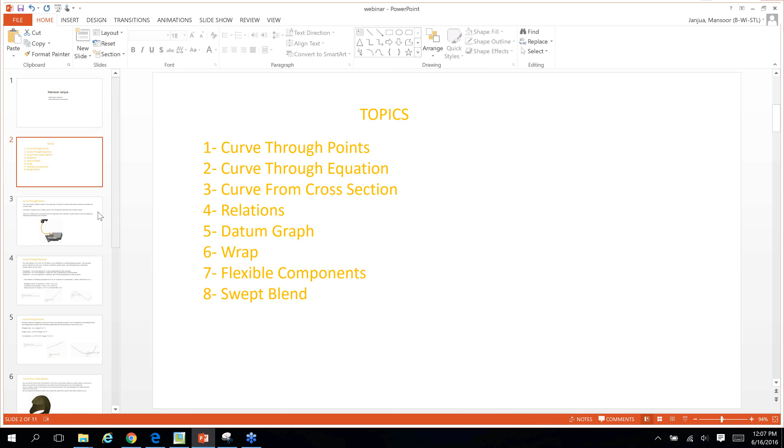So I'm going to start with the first one, which is curve through points. So basically, how do we create that? So you can quickly create a datum curve through a number of points. When those points are created as a point array, you can use a spline that enables you to create the curve through points. So the first thing is you actually need to create the points, and then you will create a spline that will pass through all of those points.

So you can select these points in one shot, or you can individually select them and then define radiuses as the curve passes through, or the straight line passes from one point to the next one. So let me demonstrate that idea. So in this case, I don't have points right now. So first, what I need to do is to basically create points.

So I'm going to go and select offset coordinate system to create the points. And now I am going to select a coordinate system with respect to which I will be creating points. So in my reference, I select the coordinate system, and then inside, I'm going to start clicking in this. And these are the coordinates x, y, and z with respect to the coordinate system that we have defined here. So I can give some values like 5, 8, and the z 3, and the x 4, and 6, and 8.

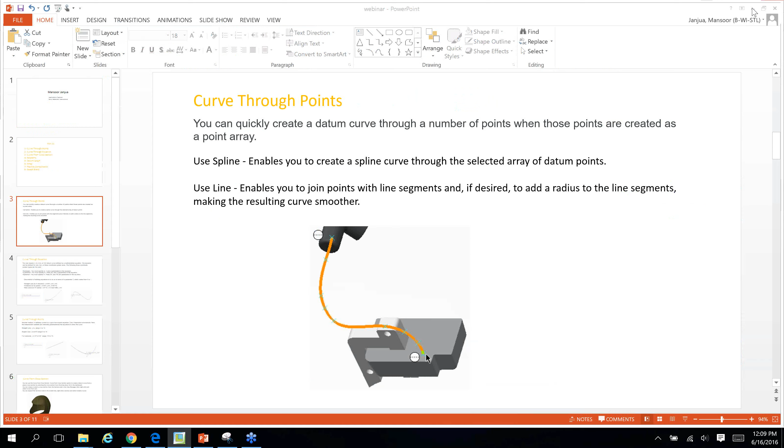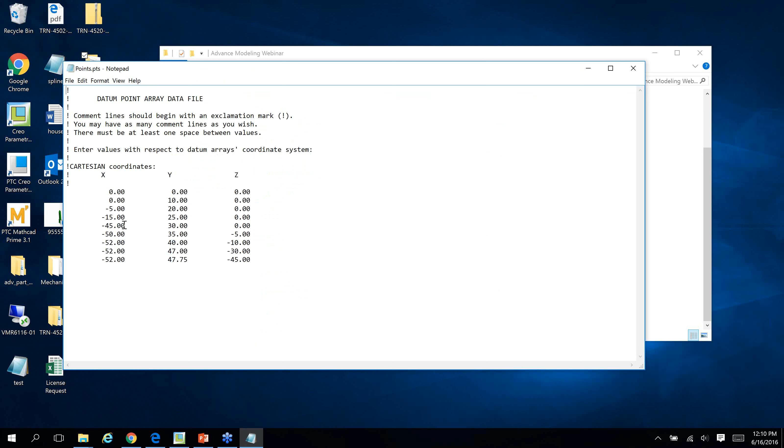Okay. So this is your Notepad file. You have all these points, x, y, and z, and this is one points file that I have created. So if you have the points file made, either you can make the points, or in this case, since I already have those, I'm going to delete those points.

So we have the coordinate system defined, and I will import the points that have been created in the Notepad file. So I'm going to import it, and this is the point file. As you can see, all the points have their coordinates defined in x, y, and z. So once I have the points defined, I can now go and select curve through points. So I will go ahead and select this.

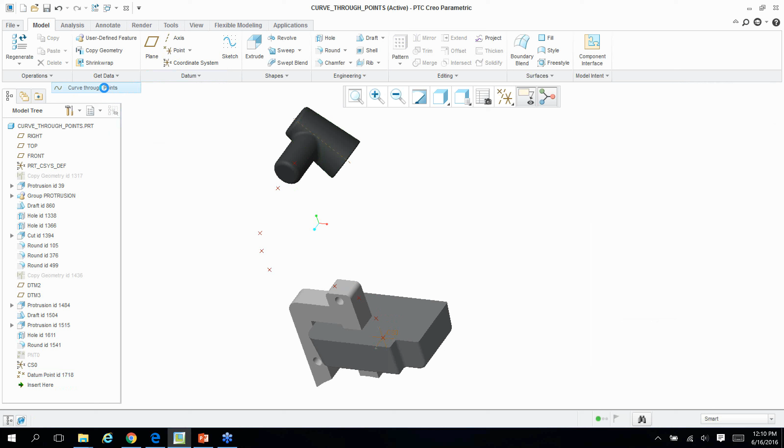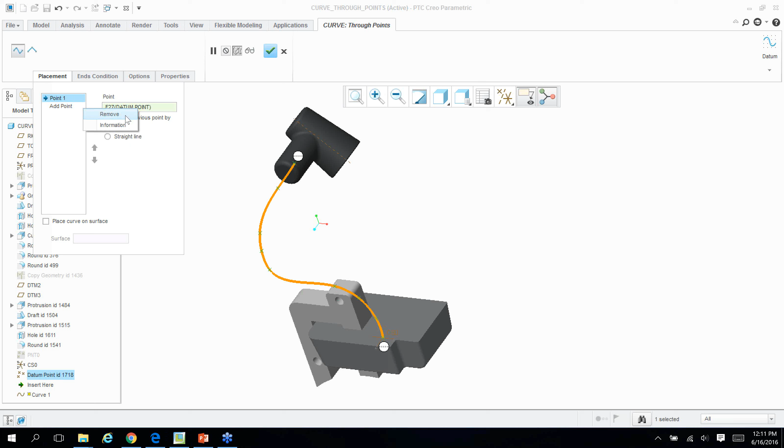I can individually select these points one at a time, or I can quickly right-click, and then all these points get selected in one shot. So right-click and then left-click, and you can see that it creates a spline which passes through all of these points. If I don't do it this way, I can manually pick one point at a time, make those either a spline or a straight line, and also add radiuses as the curve passes from one point to the next one.

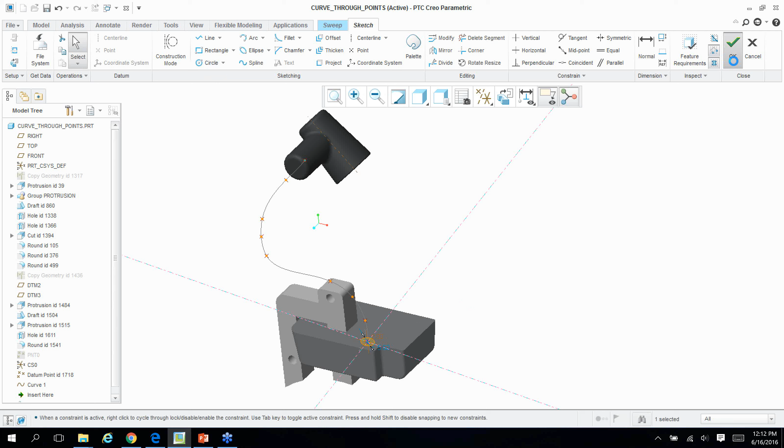So I'm going to delete these ones here, and then simply select the curve. As you can see, this is actually a 3D curve. Okay, so once the curve has been created, you can use a sweep feature and just create any sketch, which will follow the trajectory. Okay, so this is a curve that is created through points.

So the next topic in the list is the curve through equation. You can create 1D, 2D, or 3D curves using a mathematical equation, and you can define either the Cartesian coordinate system, cylindrical coordinate system, or spherical coordinate system. And there are two ways that you can define the curve. One of them is called the parameter t, and the parameter t ranges from 0 to 1.

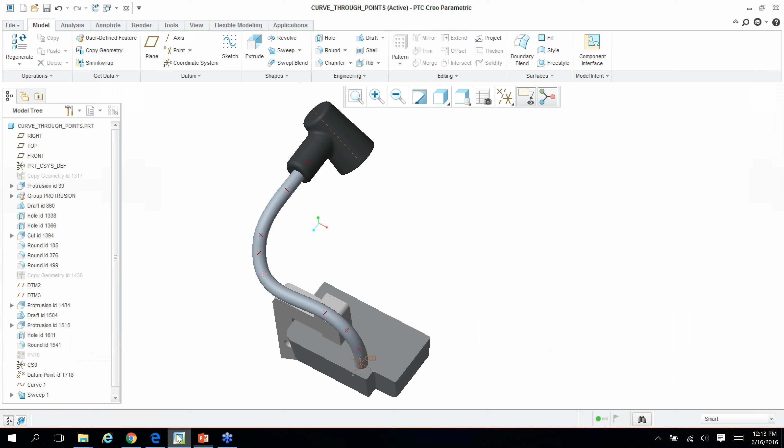So I'm going to create a few curves using the parameter t, and then I will show you the other way of making the curve through equation. All right, so to create the curve through equation, I'm going to go to Datum. Under curves, I will select curve from equation, and at this point, I have to define whether the system I'm using is a Cartesian or cylindrical coordinate system. So I'm picking Cartesian, and I also need to pick a coordinate system. I will pick the default coordinate system in this case, and then I will define the equation.

So the equation, I will write it here. x, I want it to be 6 times t, because the variable t ranges from 0 to 1. And then I also have y equals 14 times t cubed. In this case, it's just a 2D curve, so z I'm keeping as 0, even though I don't need to put z. So I press OK, and I can look at this.

So this is how the curve actually looks like. So this is a two-dimensional curve in x and y. And I can always go back and redefine the curve if need be. Okay, so that's basically the first curve that I just created.

So now I'm going to also create the curve in another coordinate system. So this one, I will define the curve in the cylindrical coordinate system. So I will pick the cylindrical. Again, I will pick the same coordinate system, and I will go to the equation. And this time, the equation will be written in terms of r, theta, and z.

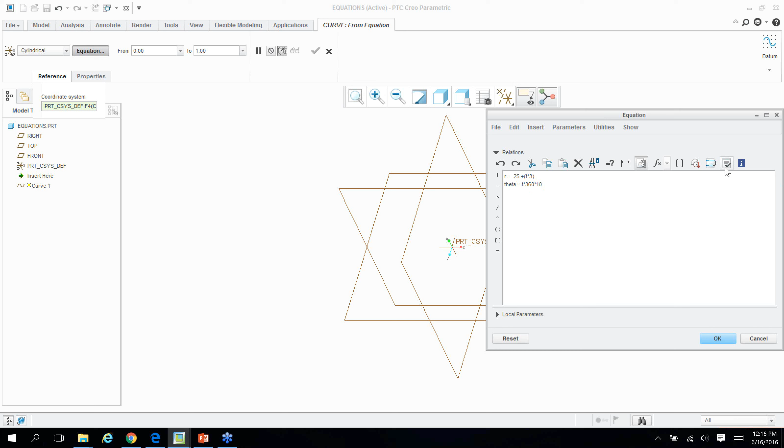And before we actually exit, it's a good thing to always verify that the equation that you have written is good or not. So you can always go and verify this equation. So relations have been successfully verified, and I can press OK. So this is how the curve actually looks like. So again, you can go and use this curve for your sweep feature. So the next one,

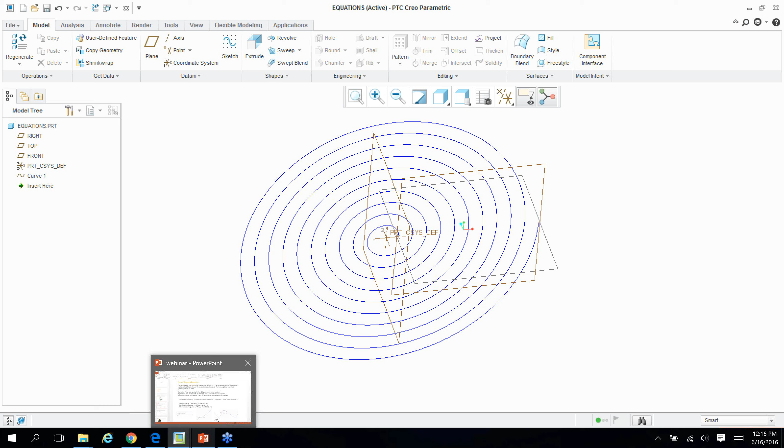in defining the curve through equation, is that you can define this equation explicitly. This is an explicit equation that instead of defining in terms of parameter t, you are defining your y in terms of x, and your z will also be in terms of x. So you will have only one independent variable, and the other two variables will be defined in that. The parameter t can only range from 0 to 1, and of course we multiply with other things to basically get a bigger range.

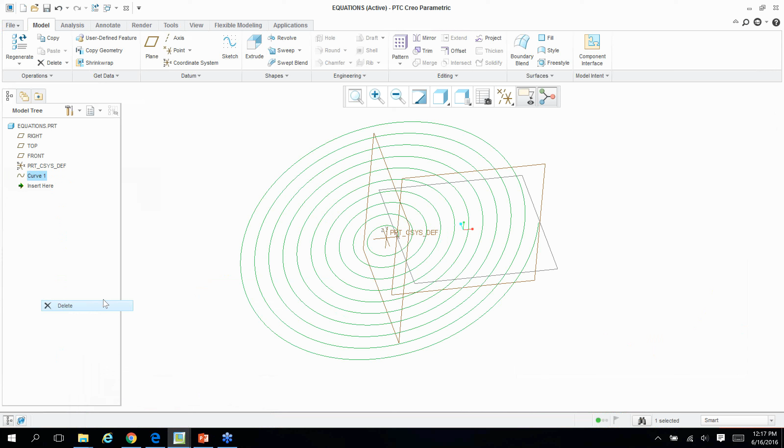But when you're using an explicit equation, the independent variable can take any values. You can basically go from a pretty high negative number to a high positive number. So let me just define a couple of equations in the explicit form. So I'm going to delete this one. So I will go back and define the curve from equation, and I will pick the Cartesian. I still have to pick the coordinate system.

Once that's established, I will go to the equation, and the equation in this case is y equals 100 times sine of 2 times x, which in this case is the independent variable, plus 10. Okay, so that's an equation, and I can verify this. So right now the x value, which, as I said, can range from anywhere, is only from 0 to 1, so I can change it from 0 to maybe 20. Actually, let me first exit out of this, and then I will give the limits.

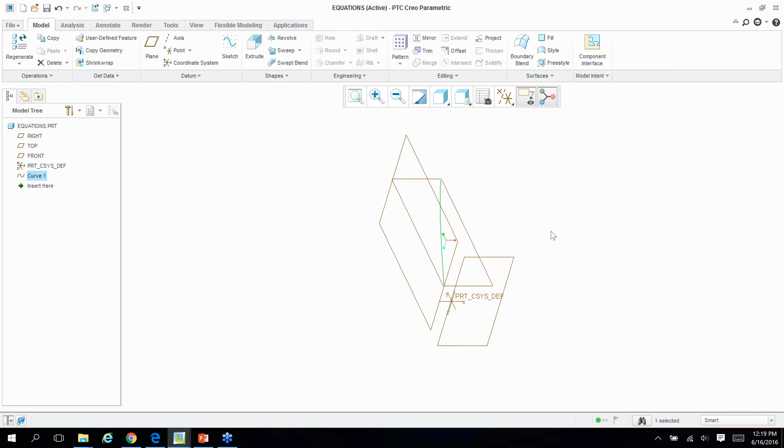Okay. So you can define this, or if you want, you can go back and define it to a bigger limit, because I have a sine wave. So let me at least get it up to this. So you can see that the sine wave is generated for x of 360 degrees in this case. So that's the equation using the explicit form, having one independent variable. I will also go and make another one in terms of cylindrical.

So curve from equation, you will pick the coordinate system, and I want the cylindrical coordinate system. I'm going to define the equation. R is equal to 1000 and z is equal to 5 times theta, so I will look at that. So as you can see, it's giving me an error message.

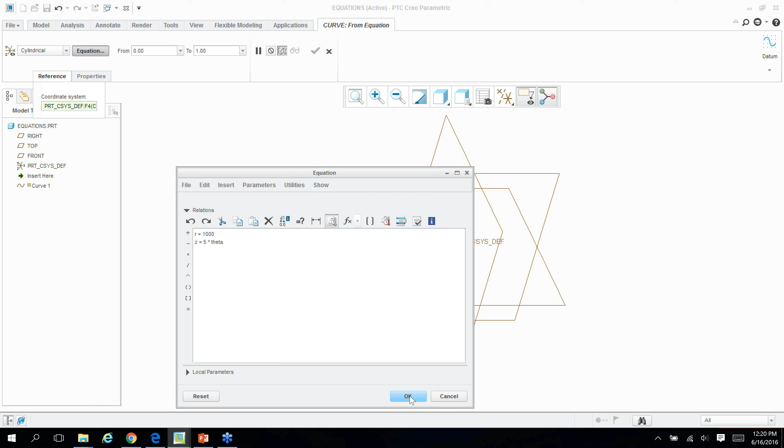So R is equal to 1000, Z is equal to 5 times theta. Okay, check your relations, everything looks okay. And then the limit for this is also from 0 to 360. And this is how the curve looks like. So you can see that this is the curve through equation.

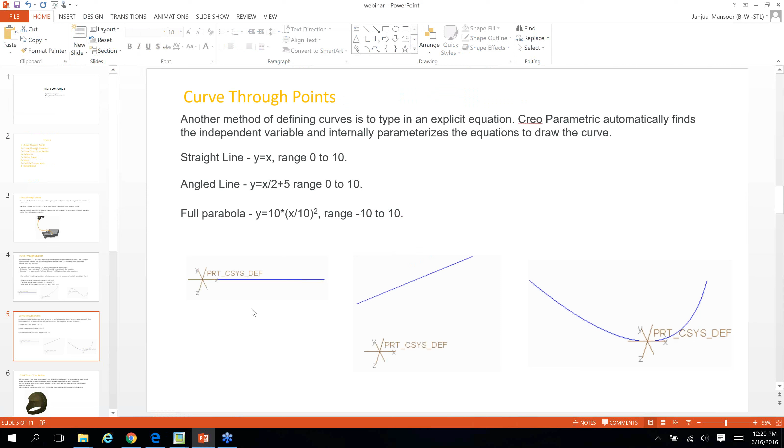And the next one in the list is creating a curve from cross-section. You can use the curve from cross-section option to create a datum curve from a planar cross-section by selecting the cross-section. So basically, we will create the cross-section first, and then using that cross-section, we will generate a curve, and that curve can be used for the features that I discussed earlier. You can use it in variable section sweep, boundary blend, swept blend and other features.

Okay, so I'm going to close these. So, curve from cross section. All right, so I'm going to go ahead and create a cross section.

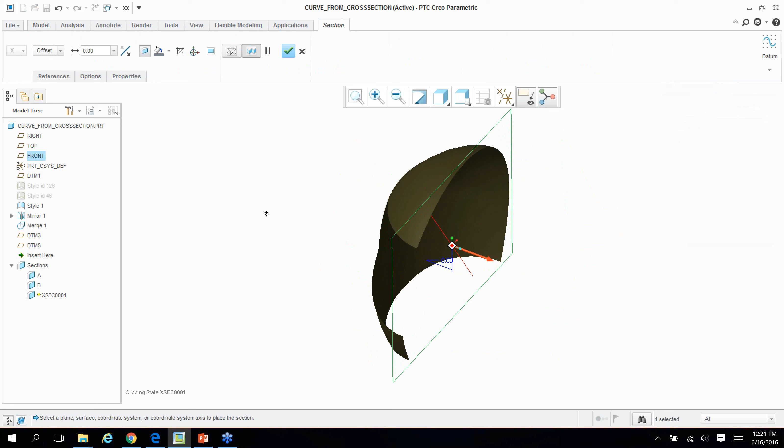Okay, so a cross section has been created, and I just want to make sure that I include the selected quilt. Okay, so a curve has not been created here, but the cross section has been created. But what I'm going to do, I can simply go and define this curve from cross section, and I simply select this over here.

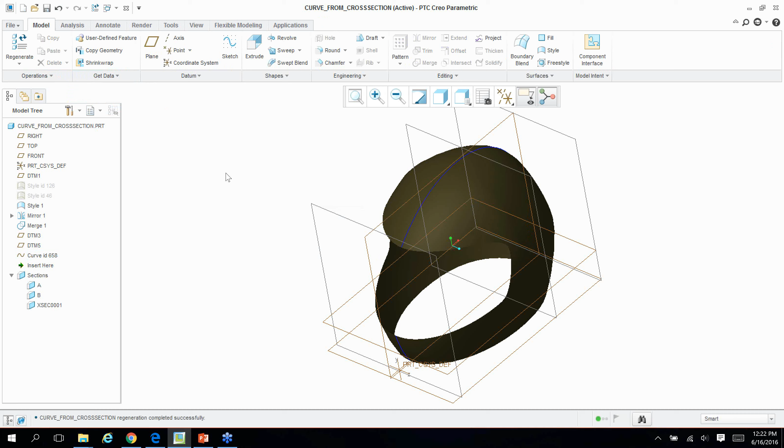So now this is a curve that I can use. So I can use this curve pretty much for any feature. So you can see that I can use this curve to define... okay.

All right, so the next topic in the list is defining relations. Relations are user-defined equations written between dimensions or parameters. Relations let you capture design intent by defining relationships within the sketches, features, parts, or assembly components. Relations can be simple assignments, equations, or complex conditional statements.

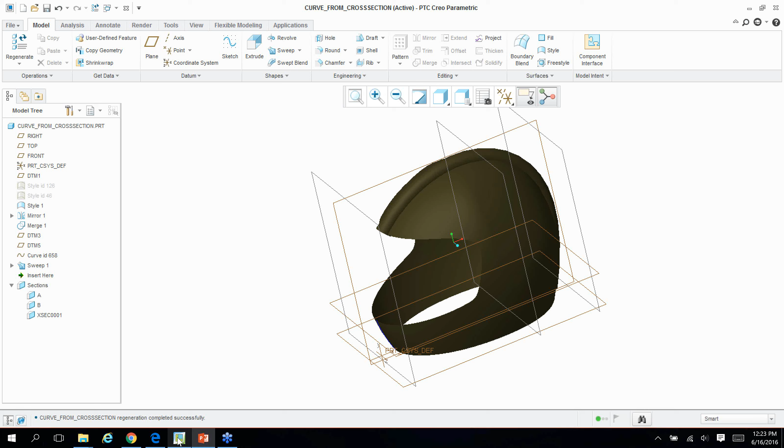So you can use relations for your design intent, how you want the part to predictably update as you make any changes, and you can also write comments on exactly how the part will update as you make changes to any of the dimensions. So I'm going to open up a couple of parts for relations.

So in this case, I want to establish a relationship between this hole and this hole, that I want the diameter of this hole to be always 1/4 of this diameter. At the same time, I want this diameter to also depend on the length and the width of the part.

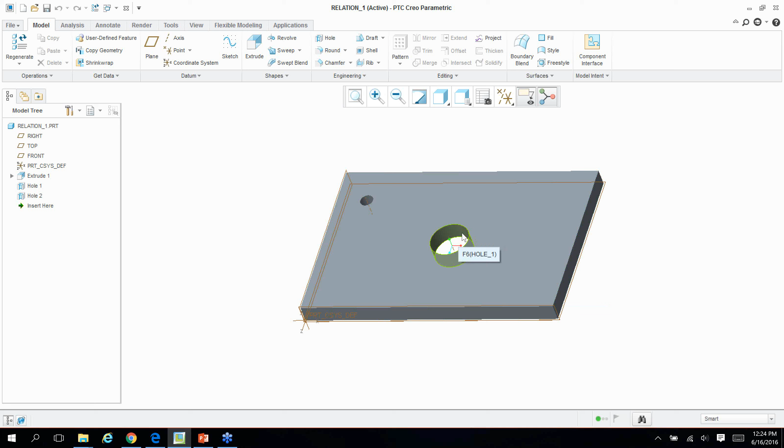So if the length of this part is greater than the width of the part, I want a certain diameter. If the length is less than the width of the part, I want a certain other diameter. And once that diameter is established, only then this diameter will be 1/4 of that. So that is what I'm trying to create in the relation.

So I will go to the relation, and I will pick all the dimensions that I can see. So I'm going to define it in terms of an if statement. So if D2, which is this dimension, is greater than D1, and I can give some space in between so that it's easy to follow. So if D2 is greater than D1, then I want dia 1, which is this diameter, to be equal to 60.

Otherwise, if D2 is less than or equal to D1, then I want dia 1 to be equal to 40. And I also want to establish a relationship between this diameter and this diameter. So I will say dia 2 will be equal to dia 1 divided by 4.

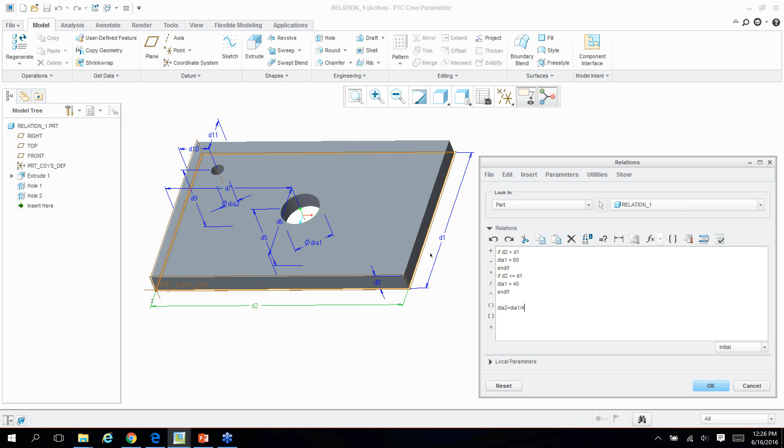So this diameter is no longer an independent variable because it's dependent on that. At the same time, this is not an independent variable because I cannot change the value. This dimension is also coming from the relation based on the conditional statement. If D2 is greater than D1, then it will be 60. Otherwise, it will be 40. So I cannot change this. I can only change these dimensions here. So I press OK.

And I will go and regenerate this. And you can see that because this dimension is greater than this, this diameter should be 60. And if I try to double click to change it, I cannot. But I can definitely go and change this extrude dimension. So now if I make this smaller, let's suppose I make it 199. Okay, so now this diameter actually becomes 40 because this dimension is less than the width of the part.

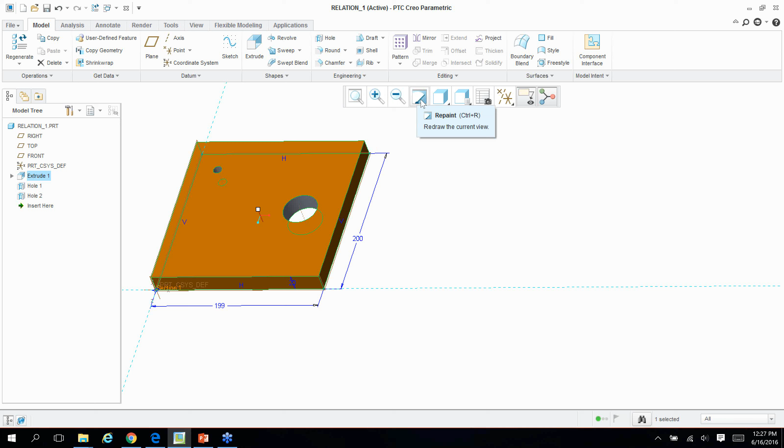So with this, you can establish different types of relations so that your part updates predictably, and you can always go back to relations and modify them. You can also write comments in your relation. Okay, so this is a comment, and before you exit out, you can make sure you verify your relations, that everything is okay. You can also insert some built-in functions, so sine, cosine, ln, log, different functions you can put in.

Another relation that I'm going to create is for the pattern members. So I want the pattern to basically update, even if I make any changes to the pattern members, I want them to be equally spaced on whatever the overall length of the part is. So for this, I'm going to establish a relation.

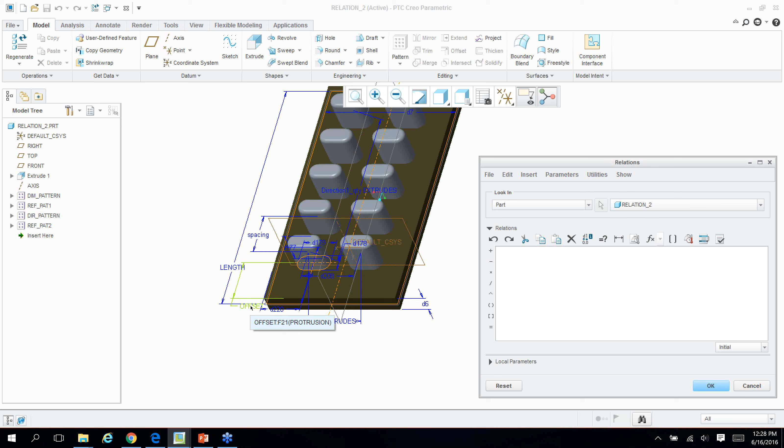So I will click on the features either from here in the model tree or on the part itself, and then see exactly what dimensions you can have. You can see them either symbolically, by just switching the dimensions, or you can see them numerically. So the relation that I want to establish is that this offset distance, I want it equally spaced in between and also in the front and at the end.

So I will say offset is equal to the length, which is the overall length of the part, divided by the number of pattern members, which is this one, plus one more, because I have extra space here. So I want to divide it plus 1. Okay, and this is the same that I want for the spacing also. The spacing is also equal to the offset because I want equal spacing. So I can verify the relations, everything looks okay.

So now when I go and I try to change this direction pattern, so instead of having 5, I can have 4 members. And you can see that they are equally spaced now. So the offset and the spacing between them have been controlled using the relation.

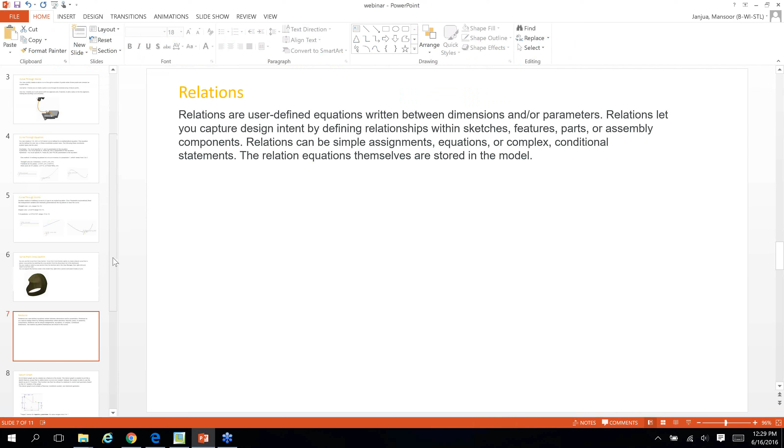And then there will be something else that I will talk about using the trajectory parameter. The trajectory parameter is very similar to the parameter t, that can only take the value from 0 to 1. So it can only range between 0 and 1. So let me go and define a graph feature. All right, so I'm going to go ahead and create a graph, actually somewhere over here.

Okay, so to create a graph, I will go to the datum group, and in here we have the graph, and I can give it a name. I will just leave the generic name graph_1. And for the graph to work, you definitely need to have a coordinate system. So I will create a coordinate system, and I'm going to create the horizontal and vertical line, even though the only thing that you need is the coordinate system, and after that you need to create a sketch.

And I will also use another center line for the overall dimension for the graph. So this is 120. And I can basically create any graph or any shape that I want. Okay, I can dimension it, or I can just leave it like this. So this is my graph, and if I need to modify, select OK, and you can come back to this graph and make changes if need be.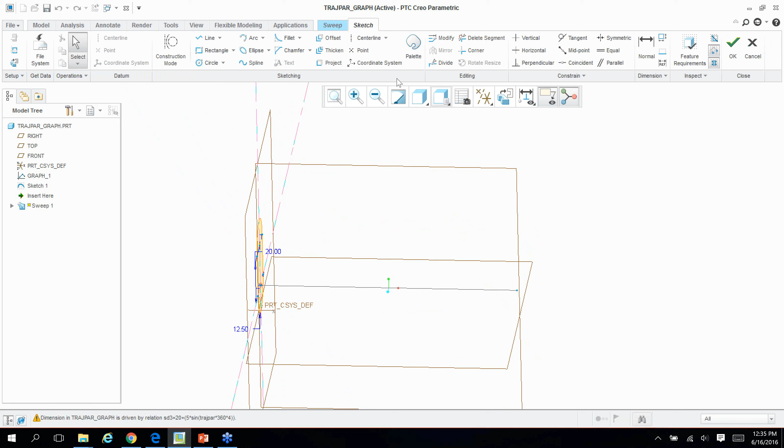So this is a regular equation that I have used based on the trajectory parameter. We haven't used the graph that we just created. So I'm going to make this a comment so it will not affect anything. So this is just a comment right now.

So the second relation that I'm going to establish now, I will call this SD3, which is this height, equals to, I want to evaluate the graph, and this is a built-in function that you can either type in or obtain from the function list. So evaluate graph, and then in quotation, you have to give the name of the graph, which is the graph one that we created.

And I will also have to say trajectory parameter, so you start from 0 all the way up to the width of the graph, which in this case is not the x, the overall length, which we made as 120 for the graph. So we are defining in terms of x and y, but the x in this case is 120. So I will make sure that my relations are okay. So now I go check mark.

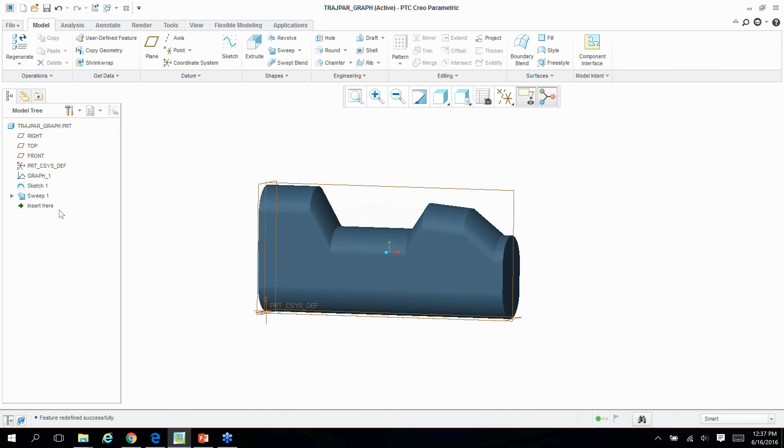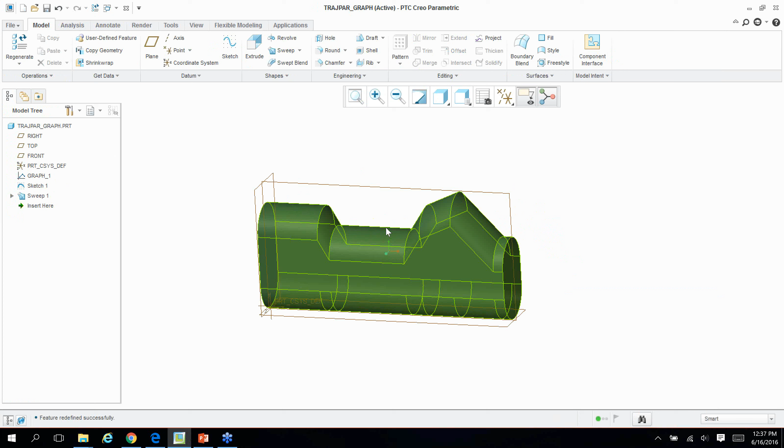So if you recall, the starting point of the graph was 33, and then as it went over, this is the sketch that we made for the graph. And if you go and modify your graph, this will also update. So this is the overall height. So I can go in and change some of this, and you can see that you're controlling the geometry using the graph.

So the next topic in the list is also a pretty neat topic: the wrap feature. There are certain curves or sketches you can make using curve through points, curve from equations, or using the cross section. But there will be some curves that you cannot make using a regular equation, like a curve which you want to go over the surface. So the wrap feature is very useful for that.

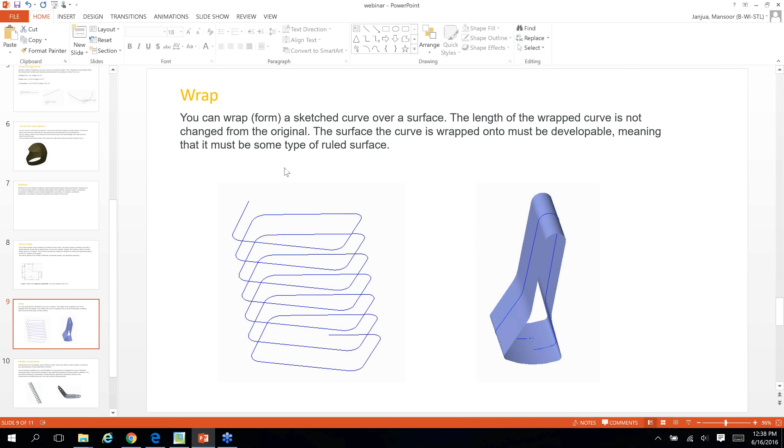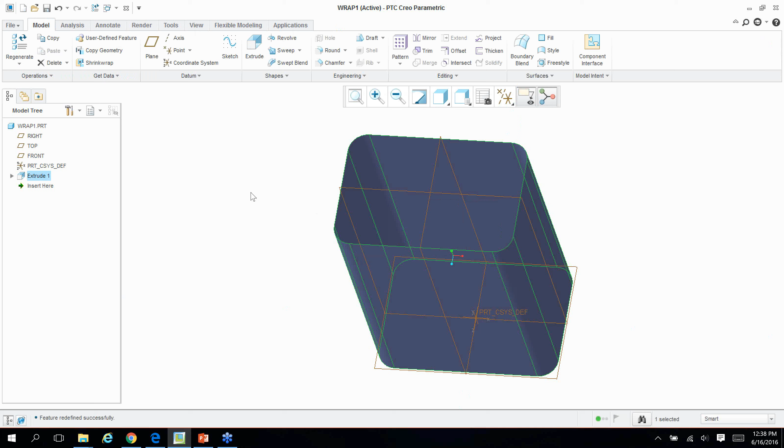So I'm going to show you. In this case, I have created an extrude using a surface. The reason I'm using a surface is so that you can hide it after the curve has been wrapped around. If you make a solid, you cannot hide that. So I will go ahead and use the wrap feature. Under editing, you can select wrap, and then I will select the quilt. In this case the quilt is automatically selected, but if need be, you can select it, and then you will go and define your sketch.

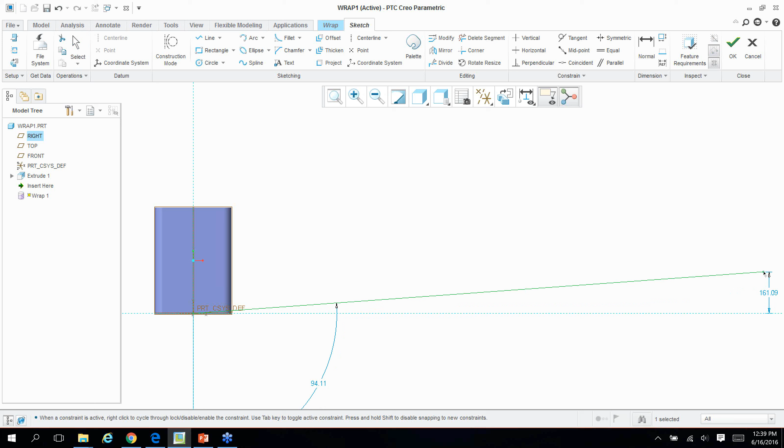So I'm going to click on define, and I will pick this as my sketching plane. Okay, so I will just draw a line like this. I will specify a height, or even I can extend it. And I also need to define an origin. This is the point for the origin. And as soon as I go, you can see that the curve gets wrapped around.

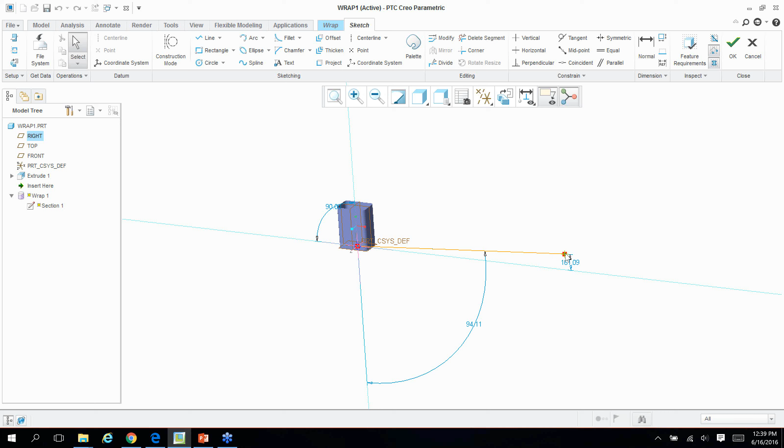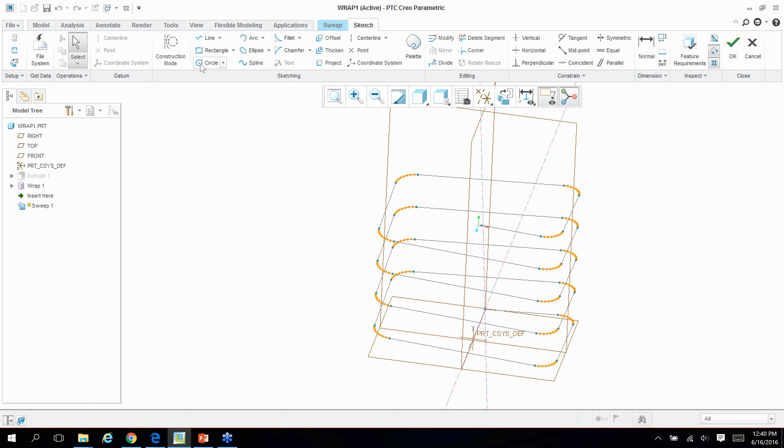You just have to have more length for this line, and then it will wrap around this feature. Okay, so I can go ahead and hide this, and you can also use this for any sweep feature that you want. You can define it, go and create a sketch.

So you can see that this type of curve you cannot get from regular datum curves. You have to use a wrap feature to obtain this. Another part that I want to show you is this wrap over here. So in this case, I have this, and I also have a curve made. So this is the surface, and I want this curve to wrap around this extrude feature.

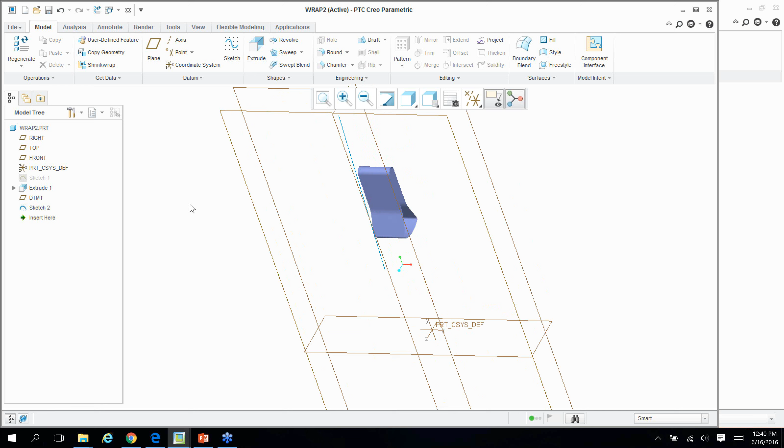So when I go to editing, I go to wrap. I select this quilt, and then I can either define this sketch, or I can actually select this sketch. So I'm picking this sketch. In the previous case, I did mention that you have to create the origin about which the curve will wrap. But there are two ways to do that: you either create the sketcher coordinate system or use the center.

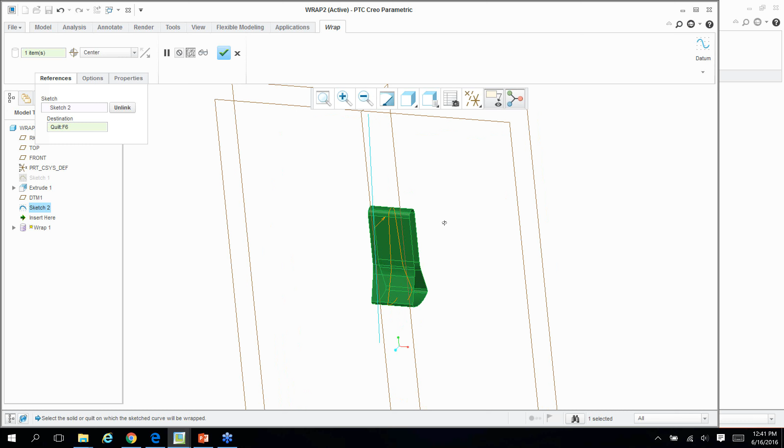The reason you have to create the coordinate system is because if you use the center, whatever the curve will be, it will just pick the center point of the curve, and you want the projection of that line, at least the half point, to be on the surface itself. If you make a long enough curve that this center is above it, it will not wrap around.

So that's why you make the coordinate system, so that you know it will always be wrapping around, because if I make the coordinate system over here, we know that it will start to wrap around from here, so it will be projected onto the surface. So if I make this curve any longer, because we are using the center of the sketch and not the coordinate system, the feature will fail. But in this case, it should be okay because it is still projected on this.

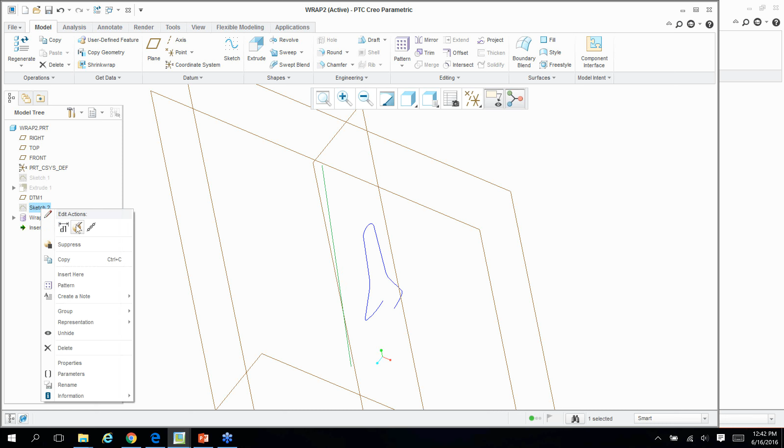So I will just hide that extrude, and you can see that it was at an angle, so then you have this feature, and you can go back and use a sweep to make it. But going back to my previous point, if I have this curve and I make it any longer, the center point will change and will no longer be projected on the surface. So if I do that, the feature will fail.

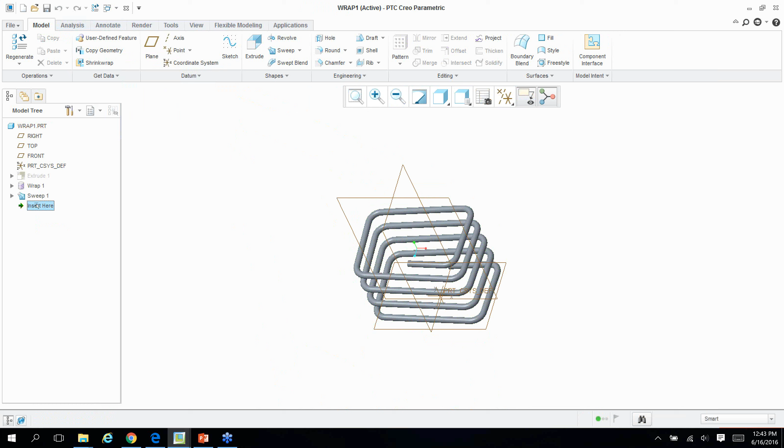So to avoid this, in the previous case, that's one of the reasons I created this wrap feature. I'm going to unhide this and make another wrap feature here. So in this case also, if I pick this and I make a line something like this, the center of this will be somewhere over here. So if I try to wrap it, the feature will fail. It will not work.

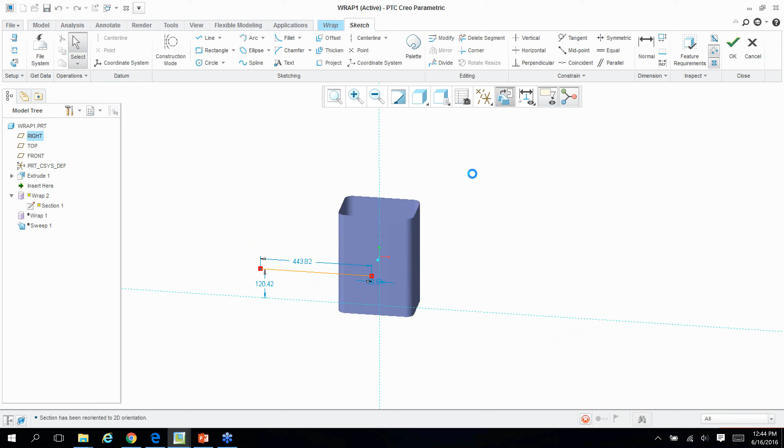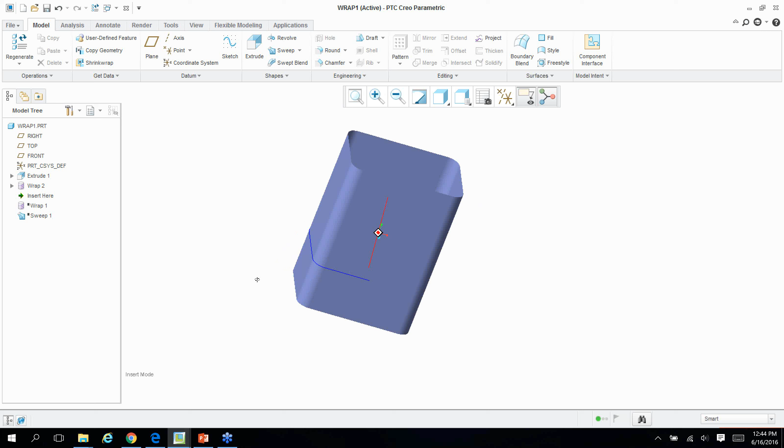So for this reason, I had to create the coordinate system. Once you have the coordinate system defined, now it's starting to project from here, which is still on the surface itself. Even if I try to make the coordinate system here and then the curve, because there is no surface, the feature will also fail in that case too. All right, so that's the wrap feature.

So let's go to the next topic in the list. The next is flexible components. Components such as springs, clips, brackets, hoses, wires, cables, rubber, and washers all typically vary geometrically in their assembled condition. So if you design a spring with a certain length and use the same spring in different places of the assembly, the distances can vary, so you can make certain dimensions flexible, so when it goes to the assembly, you can keep the same dimensions, or it will ask you to vary only certain dimensions.

You aren't actually creating new parts. If you have a bill of material in your drawing, it will still be showing this single component, but you can have different lengths as you are assembling it.

So Creo Parametric enables you to add flexibility to a component by changing the value of selected component items. Note that this change is only within the assembly, and the part remains unaltered. Whatever the length of the part is, it will stay the same, but when you are putting it into the assembly, that's when it's going to change. You can make dimensions flexible, you can make features flexible.

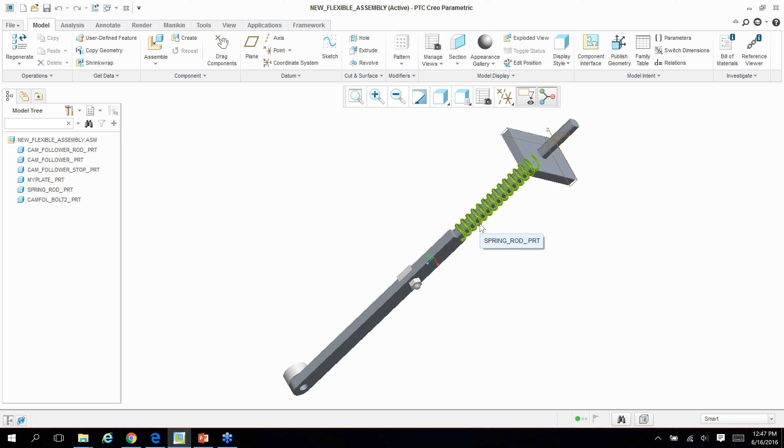There are a couple of ways. One of them is, if a component is already placed in the assembly, I can make the component flexible over there, so only that component is flexible. Or otherwise, I can make this spring flexible anytime you bring it into the assembly, because if I just do it over here, the next spring I bring will not be flexible. It will only make this component flexible.

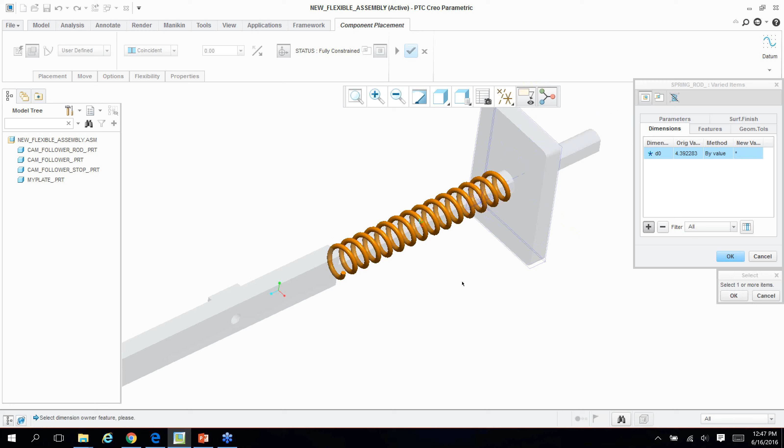So if I select this, I'm going to change this and make it flexible. And I will pick this again. So I have this dimension, and I'm going to change one of these dimensions. So how do I want to change it? I can change it by value, or I can change it by distance.

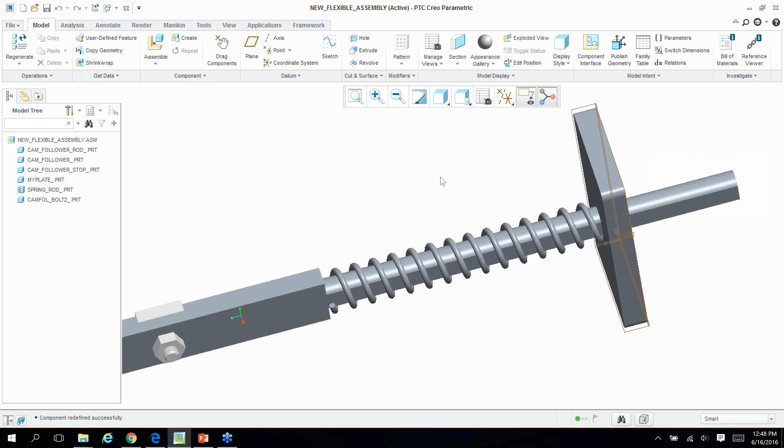So I'm going to pick this surface, hold the Control key, and pick this surface, because these are the surfaces that were used to place this component. As you can notice, initially when the spring was installed, it had this dimension, but we are trying to control it from this side to this side, this distance. I press OK. This is an assembly, so let me go back

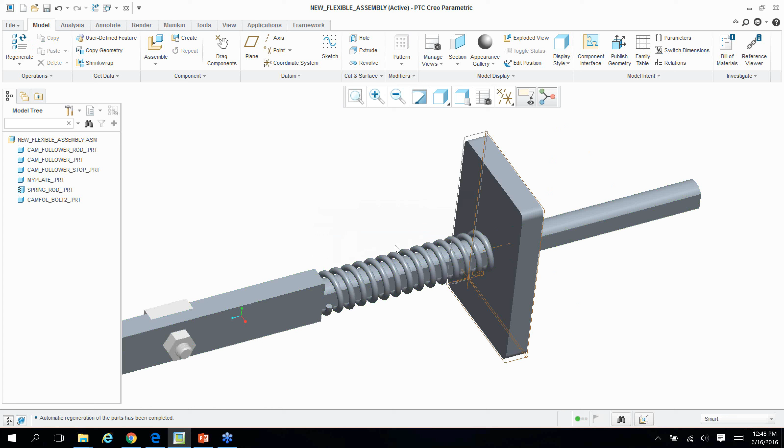and modify this. So I go to Edit. Instead of 4.5, I make it 3, and I regenerate, and you can see the change because of the flexibility in the component. But if I open this back up, it still has the same length we started out with. So I can always go back and look at this overall length.

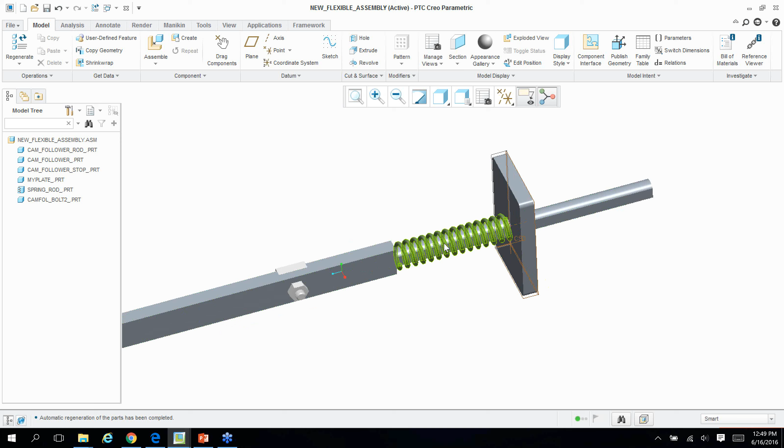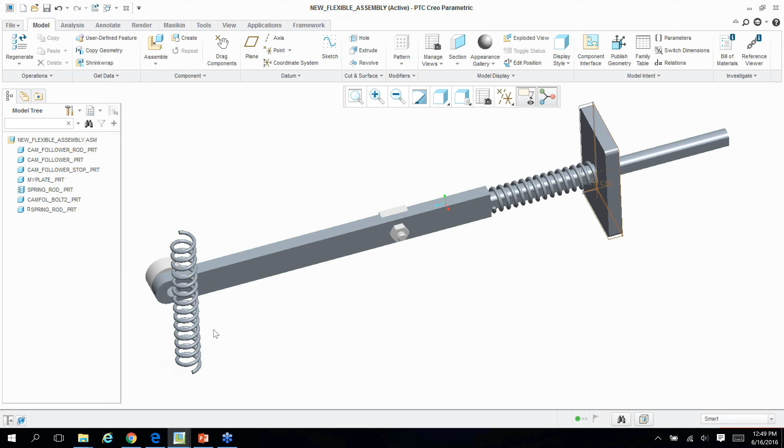So you have the 4.392, which is the length of that feature, but because it's now made flexible, it can be varied. And if I bring another spring, which is the spring rod here, this component itself is not flexible, because as you can see, it did not ask me for any dimensions to vary. It's just coming in with whatever dimension we had.

But what I can do, I can make certain components flexible. So this is the component that I want to make flexible, so that every time we go into an assembly, it asks me what features I want to change and so on.

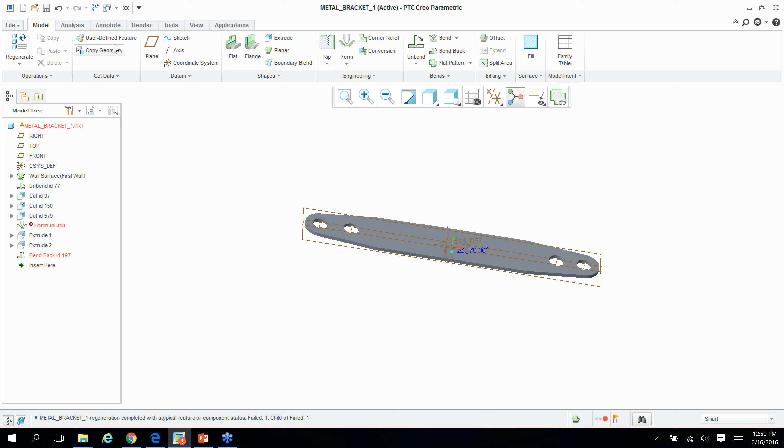Okay. I think probably this feature, I was working on it, and so I'm going to just delete that feature.

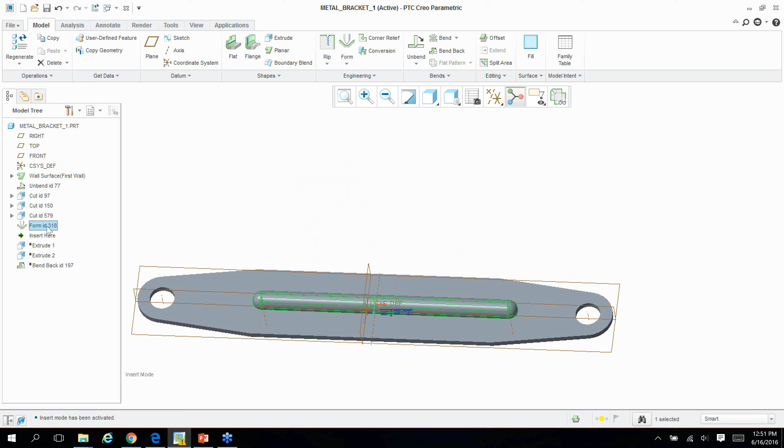All right. So I will go ahead and add flexibility to this bracket. I will go to File, Prepare, Model Properties, and in this I will make it flexible. So I will go and change. Do I want to change the dimensions? I can also add features. So I will first pick this, and I want to change this angle dimension. The part is designed at 78 degrees, but when you are assembling it, more likely it will be 90 or some other angle.

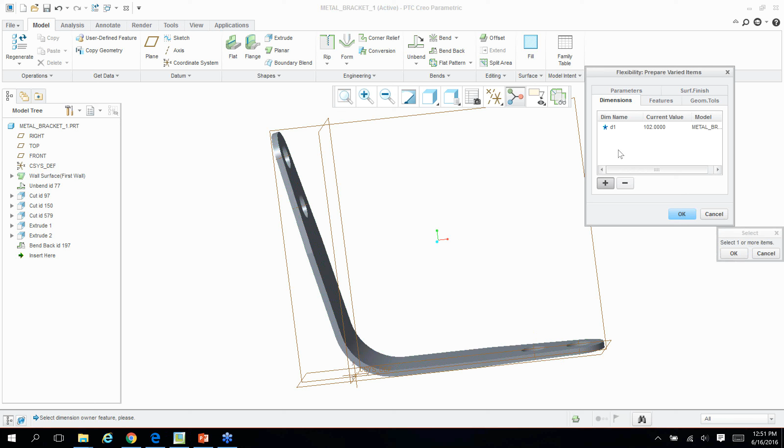So I will pick this dimension. This will be the dimension that I can vary. At the same time, I can add some features. So I can pick this hole here, hold the Control key, and pick this hole. Those are the features. Those are resumed, but I can also make them change when we put them into an assembly.

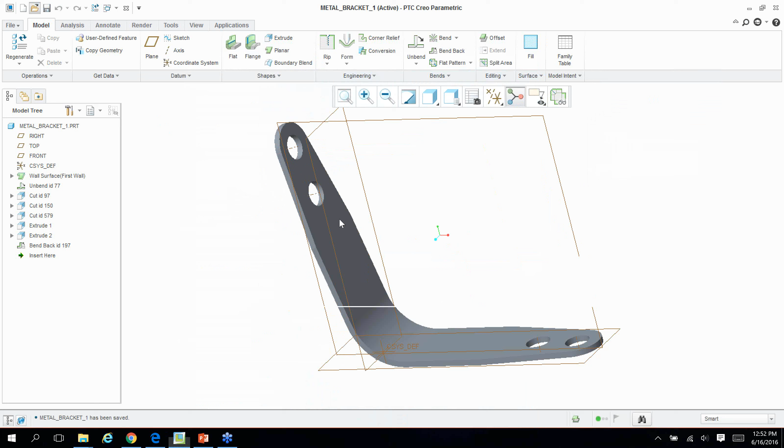All right, so I'm going to save this. So now I go and open up an assembly where I want to place this component. So I will go back and I will bring in this metal bracket. If I want to place the metal bracket in its default dimensions and the features, I will press no. But if I want to have the flexibility brought in from the part, I will press yes.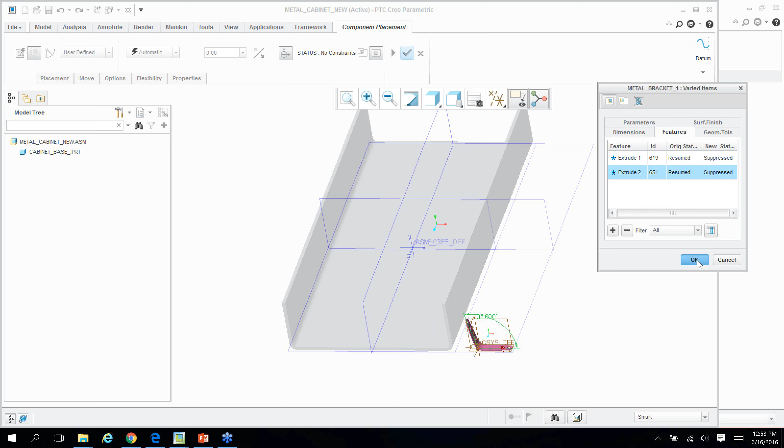So now you have the dimension that you can change. This is the original value. I will make the new value as 90. And even for the features, if I don't need the new features, I can suppress those. Okay. So after this, I can simply go ahead and select this, select this.

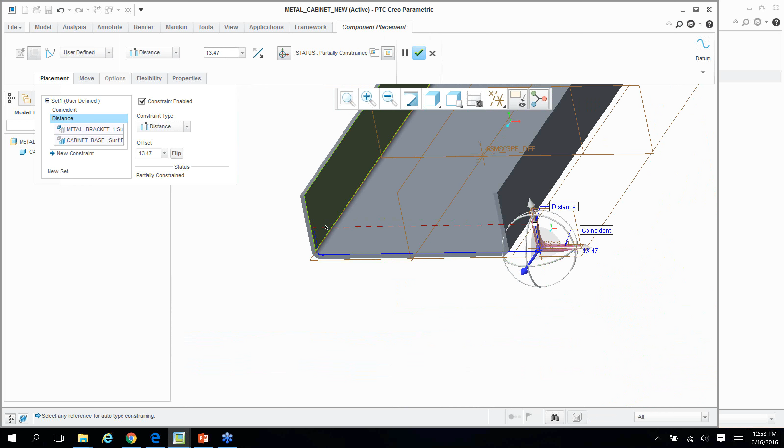I can also place it, make it coincident, and then I will also pick this surface here, and I will align, so somewhere over here. So you can see that the component has been placed, and if I need to, I can always go back and modify a few things.

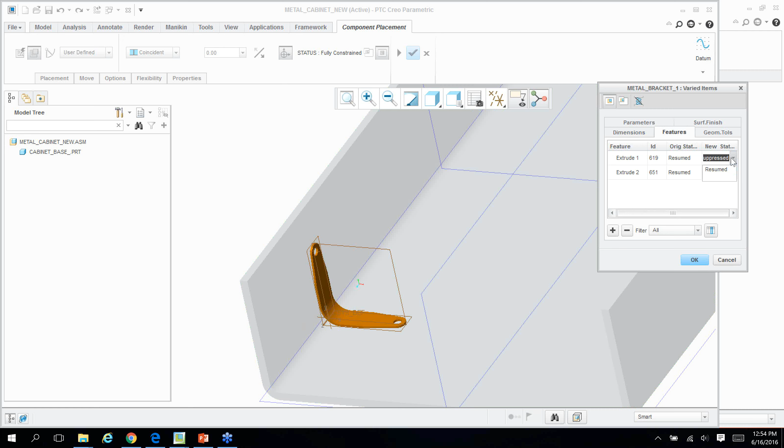So if a component has been placed or you change their flexibility, you can always go to Edit Definition, and there is a tab for the flexibility. You can look at the varied items, and if I need to make any changes to the dimensions or to features, I can go back and resume this one. So now you can see that there is an additional hole there, so that feature is resumed. So under Flexibility tab, you can go back and you can make those changes.

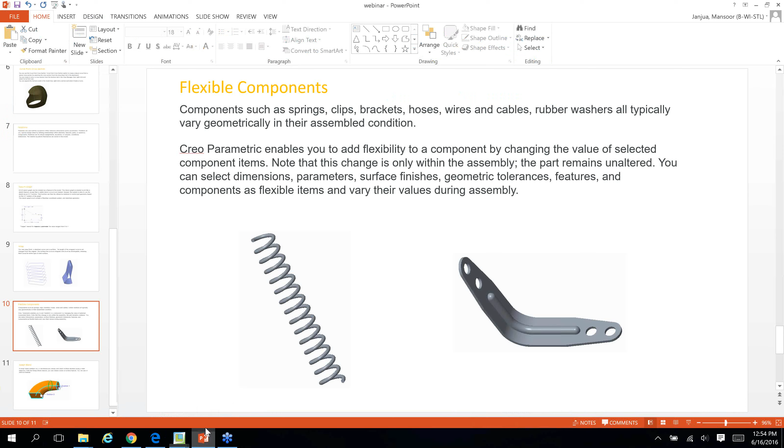All right, so the last topic that I want to cover is the swept blend. And the swept blend enables you to simultaneously sweep and blend multiple sections along the main trajectory. So swept blend is a pretty powerful tool in terms of it's a combination of a sweep feature, and it also takes in pretty much everything from the blend.

Okay, so in this case, this is the trajectory for the sweep, and these are the sections that have already been made. So first I will select those sections to show you, and then I will make a quick swept blend feature, how you actually will make it yourself. So I will pick the swept icon, then under references, I will select the trajectory, and then under sections, I will select the sections. So this will be my first section.

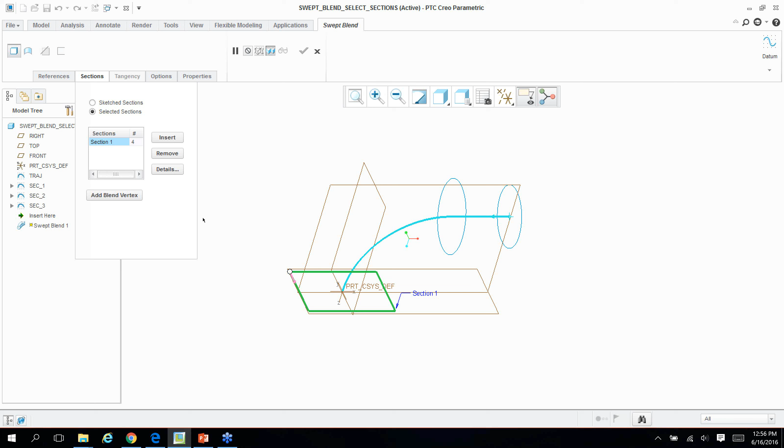This is the start point. I can change the location of the start point if need be. The number of vertices are the same, and in this case it's 4. I will go and insert. I will pick this. So this is the start point. I can change the start point to this location, and the number of vertices in this is also the same. And I will pick this. The number of vertices also need to be the same.

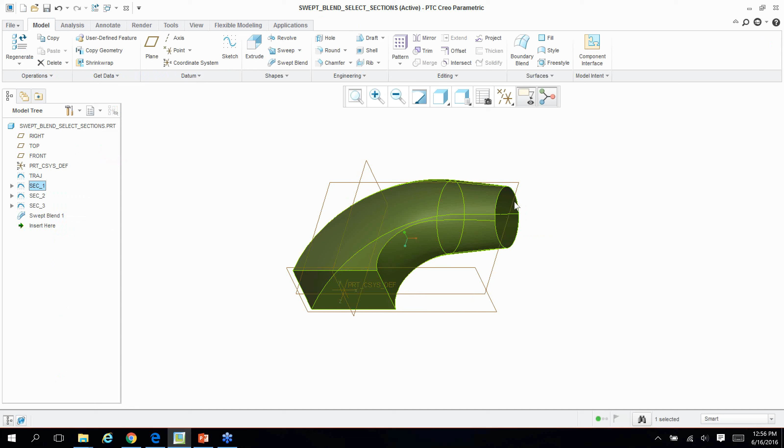And the way this works, so if I go to this sketch over here, actually, the last one, so I go to this sketch. So when you draw the circle only, it doesn't have any blend point, but you can use the divide tool to basically break a segment. And so right now, if I select the line, I can select the whole line, but I can use the divide tool to break it into multiple segments.

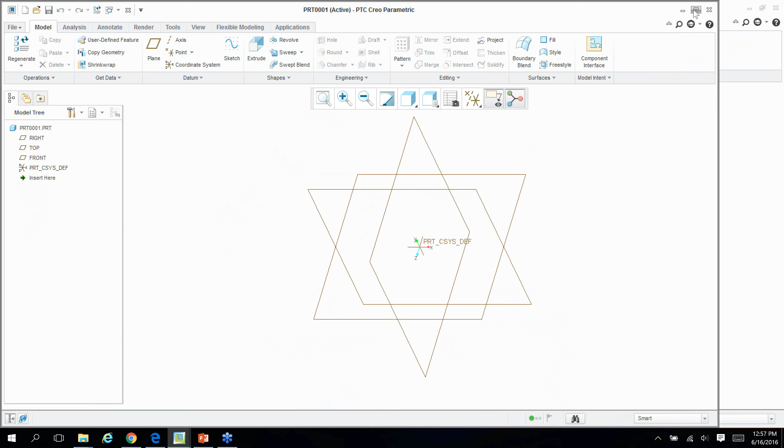So now these are independent segments, so if I need to, I can delete it. The same way it's been done here, the circle has been broken into multiple segments so that the number of blend points, the number of vertices in this, have to be the same as the number of vertices in this section. So let me also make a quick swept blend based on that. So if I start out with a sketch, I just go with a spline.

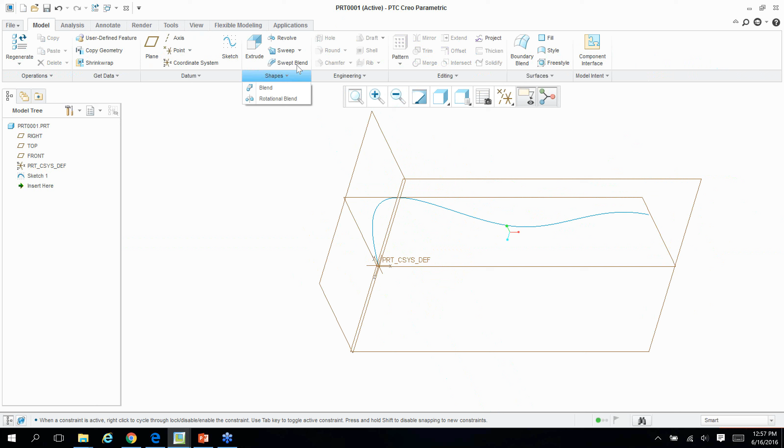So now when I exit out of this feature and I go to the swept blend, I don't really have any sketches, but if I go to the swept blend, I pick this trajectory, I go to the sections, either I can select or I can sketch. I will go to the sketch. So this is the sketch location. I pick the circle here. Let me just change the,

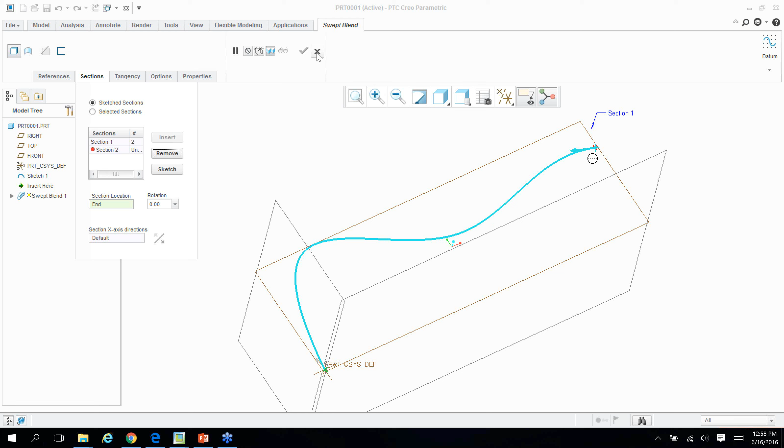Okay. And so one thing that I want to do, this is giving me the end because you need a minimum of 2 sections, but I don't want it at the end, I want to create the section somewhere in the middle. But really, I can't pick any of this right now. So I need to do something to this trajectory so that I can actually select intermediate points where I can draw these sketches. So one thing that I can do, I can go back to the trajectory.

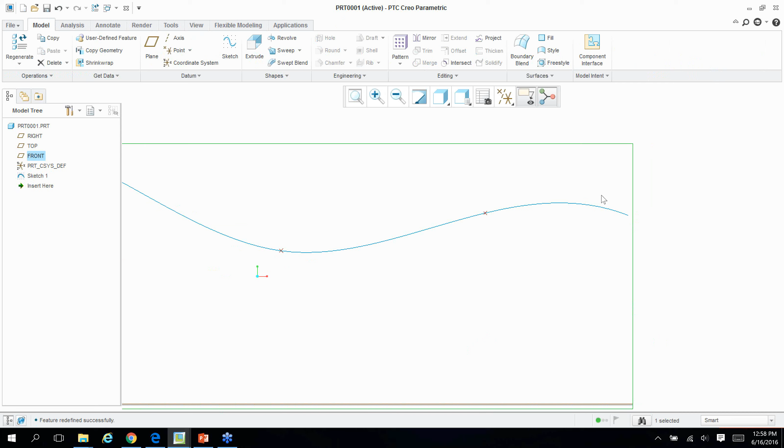And as you notice, I can either use the divide tool to break this, or what I can do, I can simply go to the point and I will create these points here. And I will use the coincident constraint to simply connect those points because I can control the dimensions of these. So now when I go and I use this swept blend, I can go ahead and sketch section.

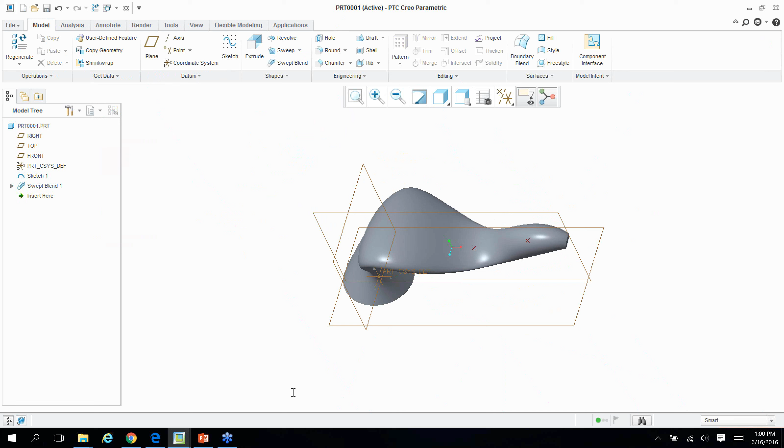So the second one that I want to do, I want to pick this, sketch. Okay, and the third one I want to select is this point here, sketch. I will use an ellipse. Okay, and the last one, I want to pick the last one, and I go to sketch. And you can see that, depending on what you want to create, you can do that. So yeah, that's pretty much what I wanted to cover in this.